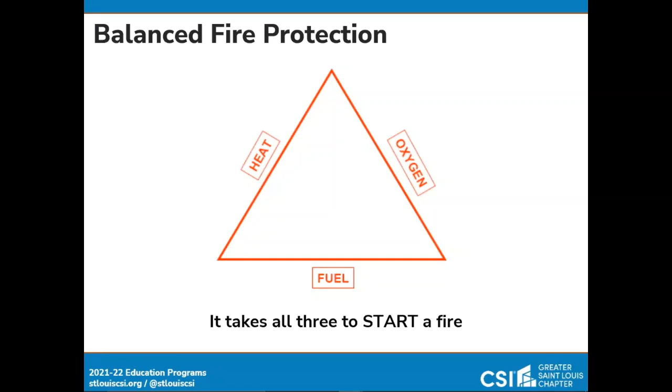In balanced fire protection, we have the same sort of thing. We have detection, or alarms. We have suppression, or sprinklers. These are active systems. Detection, or alarms, is the building saying, hey, I smell smoke. Let's get the heck out, right? The suppression is the sprinklers going off or the extinguishers being used. Underlying all this is passive fire protection systems. These are the things that are not seen but are every bit as important. And it takes all three to adequately protect the building against fire.

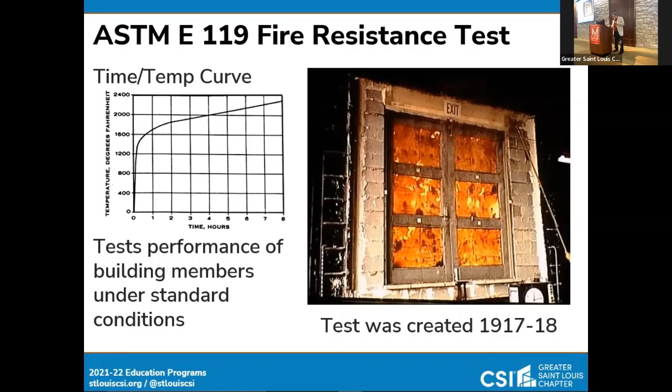Has anyone other than me witnessed this test, had an opportunity to see the test? It's wonderful, isn't it? It is just so cool. It is the E119 test, and the interesting thing about it is that the standard time-temperature curve and the test have been largely unchanged since 1917. So for more than 100 years, you are able to compare assemblies, doors, walls, and so forth. So that's basically the middle part, and that's all we're going to talk about that.

Our speakers are going to talk at length about spray-applied fireproofing and penetration and joint firestopping. We're pleased to have with us our first speaker by Zoom, Bill McHugh. We first met Bill when he was involved with the penetration and joint firestopping people, so he has experience there.

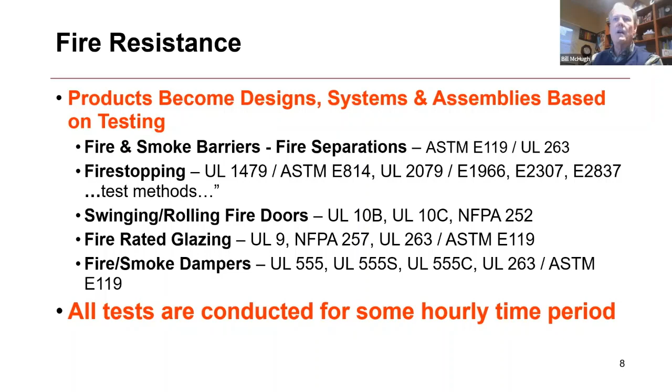One of the key things to remember, though, is none of these fire resistance pieces or elements, if you will, becomes fire resistance rated unless it's been through a fire test. George mentioned ASTM E119, UL 263, E119 being over 100 years old. All the other fire tests are based on that large-scale fire test, E119, UL 263. You'll find all of this in chapters 3, 4, 5, 6, 10 for the required ratings.

You know, how long should the fire resistance rating be? Go to chapter 4 for high rise and other types of occupancies, 6 for table 601, and of course, chapter 3 for other issues as well. But chapter 7 is how the ratings are determined. You'll probably hear more details from John Dalton and others about that. But really, we're trying to maintain structural integrity. I'm going to go really fast through this because I'm sure John Dalton and the guys from Hilti have some slides as well.

Key thing I want to point out in fireproofing is when you're evaluating any of the entrants to the marketplace, and there's a lot of new people entering the market because of the intumescent fire-resistant materials. Looks like paint, it looks like it's easy, but you know, fire resistance just isn't easy. One of the things that we found at our office is that companies call in and say, hey, Bill, I've tested my fireproofing on the bottom of a roof assembly or a beam assembly. And we did small scale tests and all that kind of thing. And I've spent a bunch of money and we think we're ready to go.

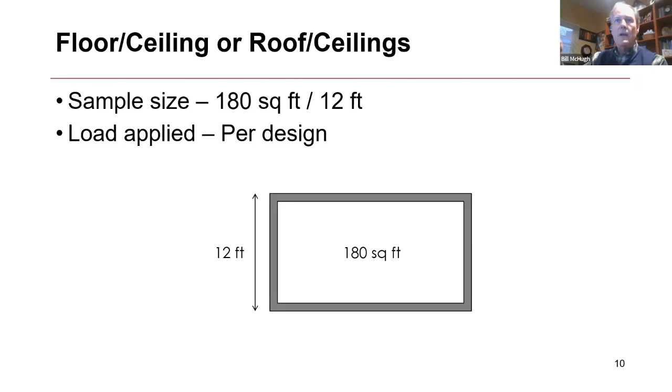And then I usually say back to them, have you done full scale testing with a load applied? Well, what do I mean about that? That means, like George said, let's get exciting and go to UL's Northbrook, Illinois facility, or you've got one right there in St. Louis. One day Carboline might want to take you to their laboratory and do a tour of their horizontal assembly fire test assembly, which is almost as big as the one here at UL.

Lay out the beams, lay down the decking, get the reinforcing steel together, pour the concrete, and then let it cure. We don't let it cure for 28 days. This goes for several months because all that water of convenience has to be gone, and then it has to get to a certain equilibrium. Otherwise, when they fire test it, the assembly will try to move the moisture out of it way too quick, and it'll basically explode in the fire test assembly, which is no fun.

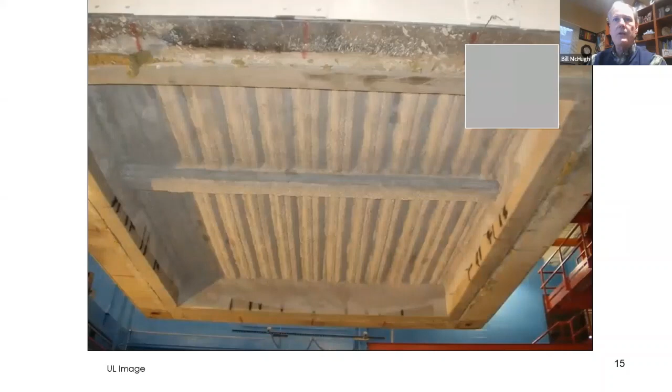So here's the horizontal assembly that you'd see at UL or any other fire test facility that has a horizontal assembly furnace to fire test these things. Look at the size of this. Small scale testing would not let the assembly sag enough to really test whether in fire conditions the fireproofing will stay in place and pass that fire test after a period of time.

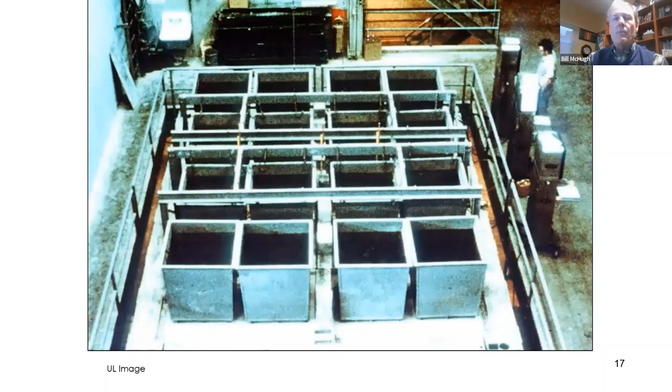All the gas furnace concept is done, as you can see here. Our buddy Andy that's in the fire test facility. This is just to show you how big these things are, 12 foot by 15 foot. An old picture, notice the 70s kind of hairdo over on the right-hand side, but all joking aside, the load is applied, whether it's through rams or filling up buckets with water, big ones, as you can see. But the idea is fire test it with a load applied to it.

Why? Because that's what happens in real buildings, file cabinets, office furniture, God knows what else people are going to put in these facilities. You want to fire test it so that horizontal assembly sags and puts strain on the fireproofing that's on the bottom of it. The manufacturers that you have in the room have tested their products in these types of applications. E119 says the acceptance criteria needs full scale with a load applied, not partial, not small scale, not modified or anything like that. So be careful when people start calling on you to talk about fireproofing, because many of them will have not invested as some of the manufacturers have.

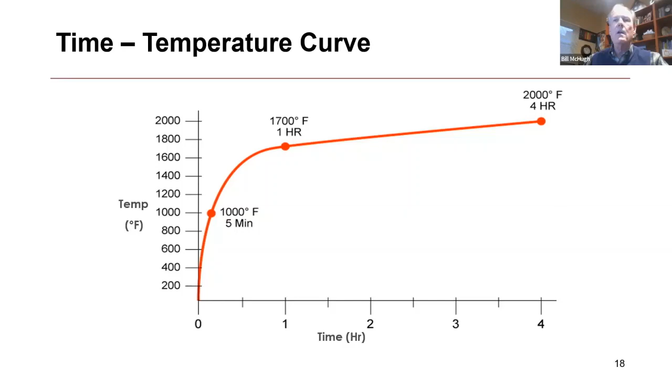George put up the time temperature curve. You'll probably see it again, but this same time temperature curve is used for fireproofing, fire stopping, fire rated doors, dampers, glazing. The whole fire protection package uses the same time temperature curve. It just changes when you change the type of materials that are being tested to become systems, because all of these are systems that are listed in some kind of a directory. We'll talk about that in a couple of minutes.

But the acceptance criteria for floor ceilings, roof ceiling assemblies: full scale testing, load supported, no flame passage, 250 degree Fahrenheit rise over ambient, meaning 325 degrees for the wall and for the floor as well. But when it comes to the structural elements, then you've got a different acceptance criteria. I'll let John Dalton from GCP handle that as well. So rapid fire through fireproofing.

Now let's talk about fire stopping a bit. Fire stopping is part of the compartmentation package that George mentioned. Structural fire resistance, structural steel, and even sometimes concrete assemblies when the fire rating is only 2 hours and need to go to 3 hours. Maybe spray fire resistant materials are used on the bottom of a horizontal assembly or on a beam of some kind or a column to increase the fire resistance rating of that concrete assembly.

But when it comes to compartmentation, as George pointed out, certainly the fire resistance rated wall and floor is tested to ASTM E119, but then you've got all of these other holes that are made for various reasons in a building, to run piping and services, to run air, to allow people to egress the building, and even to see things, because fire rated glazing is a new concept that's really taken off over the last few years.

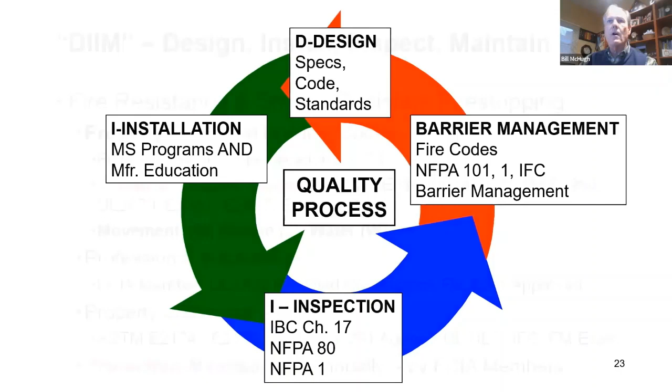You know, some states adopt it, others opt out of it, but in your specifications to cover yourself, make sure you've got it covered in Division 1, of course, the schedule of special inspections, and then the qualifications or standards that are used for fireproofing and fire stopping will be over in the other spec in Division 7. For fire stopping, it's 078400. For fireproofing, it'd be 078100, the general specifications for fire stopping and fireproofing.

When it comes to installation, UL qualified contractors, FM 4991 contractors, and then also there's UL qualified contractors for SFRM fireproofing. And then we've got from the NFCA a contractor accreditation program as well. The inspection standards, E2174 and E2393, are the fire stop inspection standards. The FCIA was a code proponent to put those into the International Building Code back in the 09 cycle for the 12 code. And special inspection for fireproofing has been in going back to the legacy codes, whether it's BOCA, UBC, or the Southern Building Code Congress International.

The one thing I want to really point out to you, though, is that it's not a product spec, any of this stuff, whether it's GCP or Hilti or Carboline or 3M, STI, Isolatek, any of the members of the NFCA, the FCIA, they've all spent millions of dollars at FM Approvals or at Intertek or any of the other laboratories coming up with tested and listed systems. And visiting the Product iQ, this is how people compete. You got to show the system. Can't just show the product or look for the product, but the system is what the contractor needs to be selecting. And by you communicating that through the construction documents, it'll get done right in the field.

Part of your specification, whether it's fireproofing or fire stopping, there's a listing under the UL Product iQ that'll cover whatever it is, boards and wraps, SFRM products, IFRM products, all found here at Product iQ. Intertek has their directory too. Or if you want to go to the FM Approval Guide, mainly fire stopping, not much in the steel fire protection industry in that. But what I really want to hone in on is specs, you know, it's the Construction Specifications Institute. So let's talk just for a couple of minutes about specs.

The fire stopping general spec, you know, there's 5 or 6 different sections in MasterFormat 2020 version that talk about fire stopping. But really you want to put it all in one place because the standards are very similar and the installation pieces are the same. The special inspection, similar. Keep it all in one place, 078400, and then specify in the other sections where the penetrations might be, plumbing, piping, et cetera, to go look at 078400. Same thing with fireproofing. Start with that 078100 and then use the standards from there as well.

Key things to remember, it's a system specification talking about fire resistance and not a product specification, but you still need to cover product properties in your specification to make sure that products are able to survive in the environment that they're going to be exposed in. FCIA member in good standing, NFCA member in good standing, all good things. There's an FM 4991 standard for the approval of firestop contractors, a UL qualified firestop contractor program. Again, the NFCA accredited fireproofing contractor for either SFRM and IFRM. And of course, we think it's really important to involve the manufacturer in the education of these contractor companies and their personnel as well.

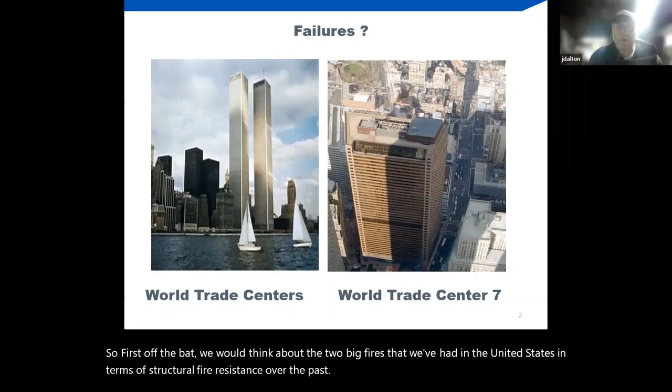First off the bat, we would think about the two big fires that we've had in the United States in terms of structural fire resistance over the past 20 years. Clearly, the two World Trade Center towers and Tower Number 7, and you could look at those and say they were significant failures of the fire resistance systems, and in some instances they were.

You would look at the two Twin Towers and you'd say, well, they did fall down. Certainly they did, and there's very few buildings in the world would be able to survive that sort of an impact, but they did stay upright for the best part of an hour, and thousands of people, maybe tens of thousands of people, were able to escape the buildings before they came down, based upon the fire resistance systems that had been put in there.

Clearly the sprinkler system would have been overwhelmed almost immediately, and it was a huge fire in terms of heat, not really enormous, but a huge fire that burned at sort of 1,000 degrees or so for the best part of an hour, and the buildings came down, as we all know. World Trade Center Tower Number 7 collapsed later on that day, and nobody was killed. It was an empty building at the time, but it was a spectacular failure.

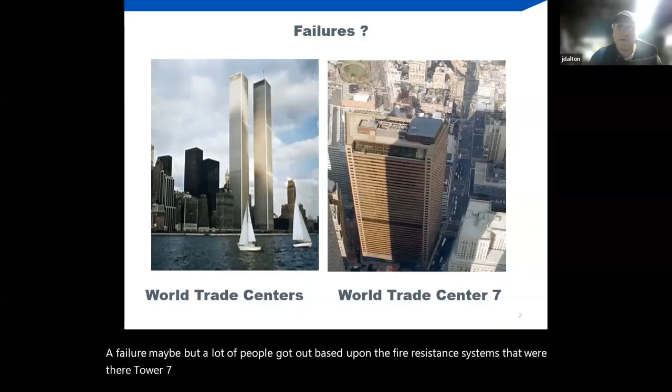So the World Trade Center Towers 1 and 2, a failure maybe, but a lot of people got out based upon the fire resistance systems that were there. Tower 7 lasted for 5 hours in a fully engulfed flame over several stories. And there was a lot of information gained from that because it was so widely studied, because we had so much information that was available to us. And so in terms of, is it a failure? Maybe, depends on what you define as a failure, but we learned a lot from it.

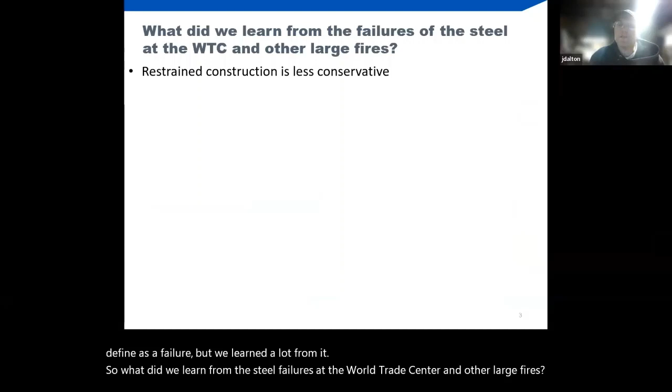So what did we learn from the steel failures at the World Trade Center and other large fires? We learned that restrained construction is less conservative. Restrained construction is a manner of doing the fire test that allows the supporting frame to help support the beam. And it's a much less conservative approach than the unrestrained systems, which are all temperature based. And big fires where the buildings have collapsed or there was a complete failure of the system tended to be restrained.

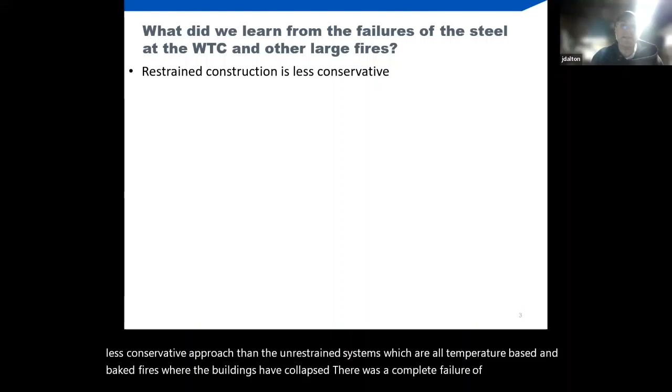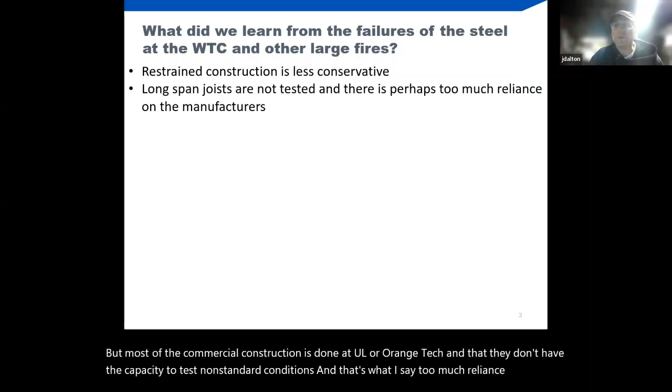Long span joists are not tested, and perhaps there's too much reliance on the manufacturers. So the manufacturers will test to a certain system, in most cases we would hope a full scale furnace at Underwriters, but we don't have the ability to test everything, and we're still not able to test long span joists, except if we would go to somewhere like NIST that have the capacity. But most of the commercial construction is done at UL or Intertek, and they don't have the capacity to test non-standard conditions. That's what I say, too much reliance on the manufacturers. So a condition which nobody had tested, nobody could test, and we were still sort of able to engineer our way to a system that eventually didn't turn out to be successful.

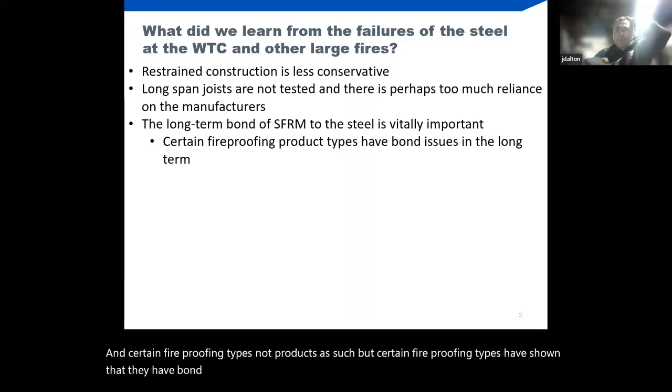The long-term bond of SFRM, so SFRM is a term we use to define passive fire protection. That long-term bond of the product to the steel is vitally important. And certain fireproofing types, not products as such, but certain fireproofing types have shown that they have bond issues in the long term, right? So one of the things we learned from the World Trade Center Tower was that there was a significant portion of the steel that had no fireproofing on it at all, because it had been in place for the best part of 30 years, and the bond of the fireproofing to the steel had decreased to a large extent on lots of floors.

Now they were going up the building and replacing fireproofing as needed, or when floors became vacant. But that long-term bond of the fireproofing to the steel is very important. You know, if you spray it and 28 days later it passes a bond test, but it's not there 28 months or 28 years later, it's really a failure. So we did learn something from that. And the NIST report talked about a lot of things, but I'm just dealing with the fire protection systems.

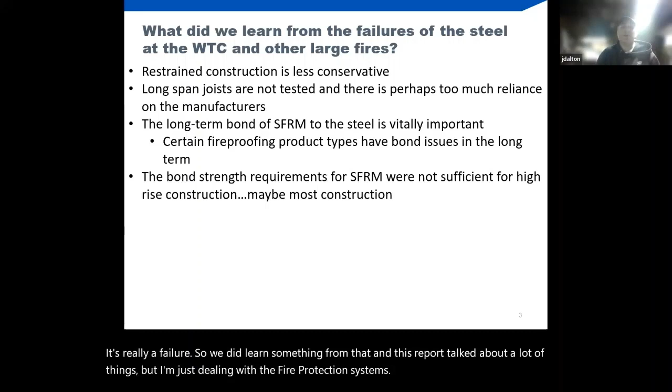The bond strengths of SFRM were not sufficient for high-rise construction. High-rise construction is much bigger of a target if you were interested in taking down a building. Though the bond strength of fireproofing was the same regardless if you were building a 2-room auto showroom on a ring road or a 70-story high-rise in the middle of a city. And so as a result of the World Trade Center tower failures, there was some review of the bond strengths of fireproofing on the structural steel.

Inspection and maintenance of the SFRM was not a priority. Bill touched about that, and he and the NFCA and others were successful in making this more of a priority. It's not just a case of spraying it and hoping for the best, sort of feel-good fireproofing, spray and pray fireproofing.

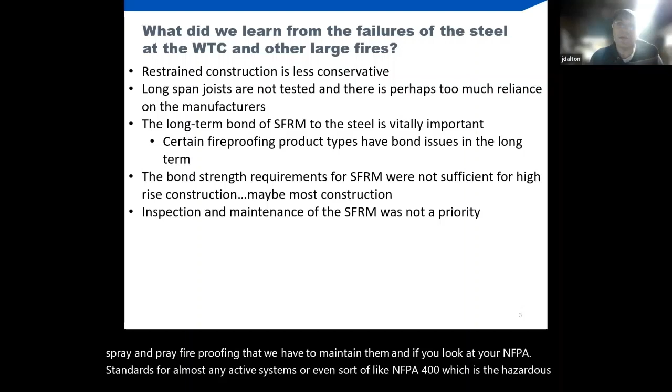We have to maintain them. If you look at your NFPA standards for almost any active systems, or even NFPA 400, the Hazardous Materials Code, that talks about inspection, testing, and maintenance. Nearly every NFPA code has an ITM section, typically towards the back, but it's annual, or every couple of months, or 5 years, every pump has to be retested. And we didn't have that requirement. We still really don't have that requirement for SFRM, but we're moving in the right direction.

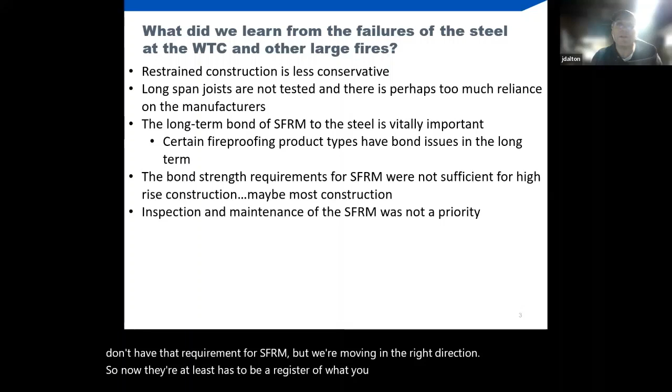So now there at least has to be a register of what fireproofing is on site, and you're supposed to at least look at it once a year, just to make sure that the product remains on the steel. If it's not there, it can't work.

There's a fairly famous study by a fire protection professor at the University of Maryland that talks about the failure of unprotected steel. A W10 by 49 column, which is a fairly common one that we test, will see significant reductions in the fire resistance rating if you expose pieces of steel the size of a quarter. So a piece of unprotected steel on a W10 by 49, you can expect to see a reduction in the fire resistance rating of about 15% of 1 hour.

So if it's fallen off or been knocked off by other trades, you'll see significant reductions in fire protection. There's a saying within fire protection that a failure anywhere leads to a failure everywhere really quickly, and that's just the way it is when you see fire tests.

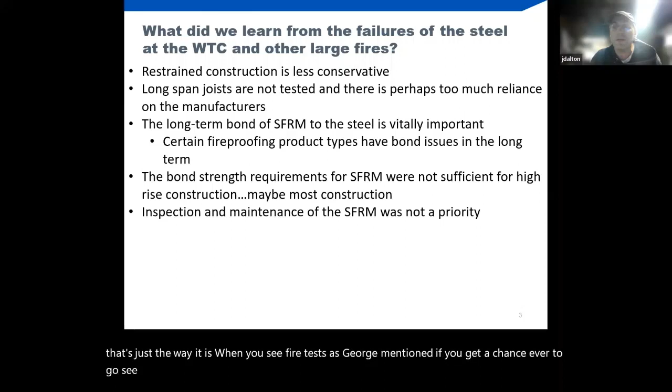As George mentioned, if you get a chance to go see a full-scale fire test, it's really illuminating how hot they get, and how quickly things go pear-shaped once they start to go. It's fine, it settles along, the fire test is great, and then all of a sudden it just gets hot, and once it starts to go, it goes really quickly.

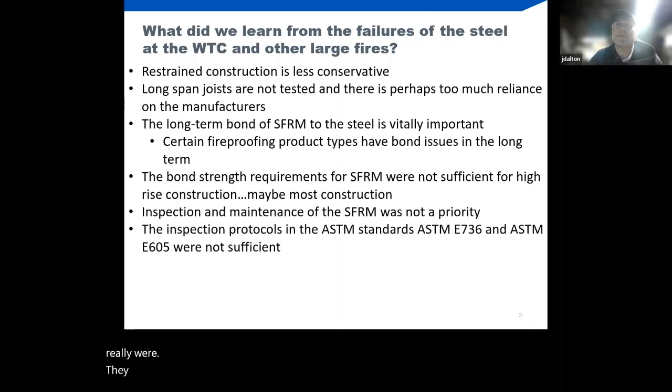The inspection and protocols in the ASTM standards E736 and E605 were not sufficient. They really weren't. They didn't require enough inspections, so you could do very little inspections and get a pass on the building. The building code has been modified now to increase the inspection frequencies.

As I just talked about, no maintenance or periodic inspections are required. So what did we learn? Restrained construction, less conservative, I mentioned. What's become of this? Nothing really. That is still a thing. There has been no real move away from allowing buildings to be deemed restrained. The building code does require that everything be initially classified as unrestrained, which is appropriately conservative.

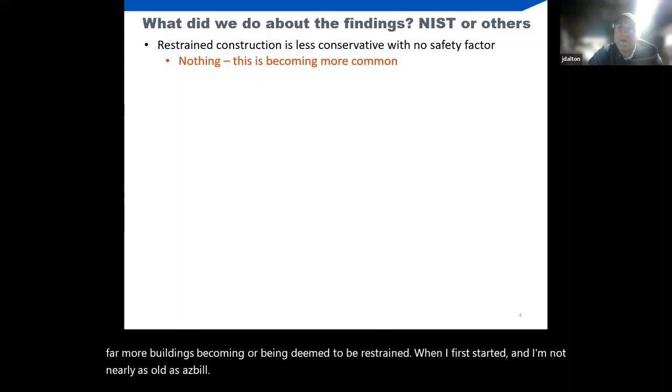But we do now see far more buildings becoming or being deemed to be restrained. When I first started, and I'm not nearly as old as Bill, we never saw restrained construction anywhere outside of New York. Now we see restrained construction everywhere.

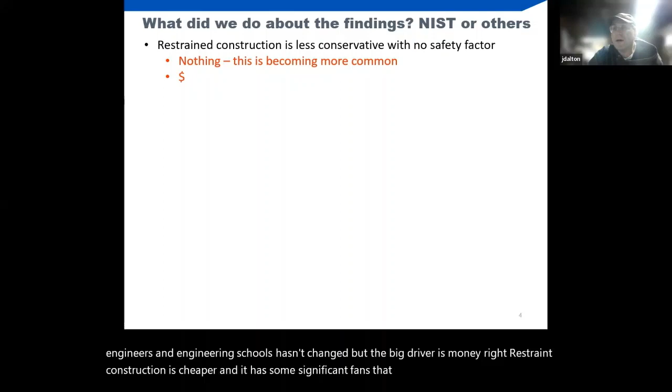The methodology hasn't changed. The teaching of structural engineers in engineering schools hasn't changed, but the big driver is money. Restrained construction is cheaper, and it has some significant fans that have been pushing pretty hard on the code cycle, trying to figure out ways to manipulate the ASTM and UL standards to get more products or projects deemed restrained. So unfortunately, that hasn't been beneficial.

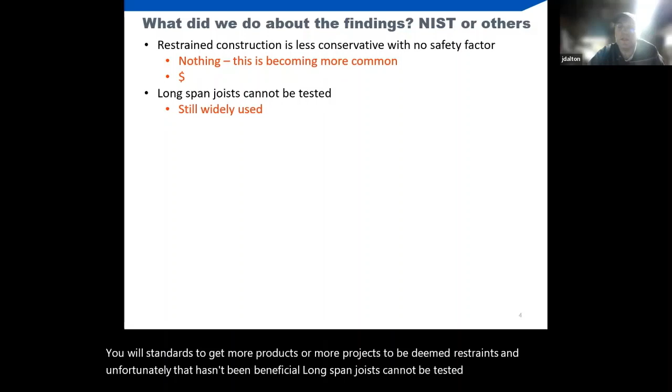Long span joists cannot be tested. They're still widely used. We still see trusses 60, 70 feet long. We have no way to test them. We've no idea how our products will react when exposed to that level of deflection during a fire test. Ambient conditions are fine, there's no real issue. It's when they get hot and start to sag, what happens? Because we're just not able to test at that level or length of span, and we can't measure or know how we'll do with that level of deflection.

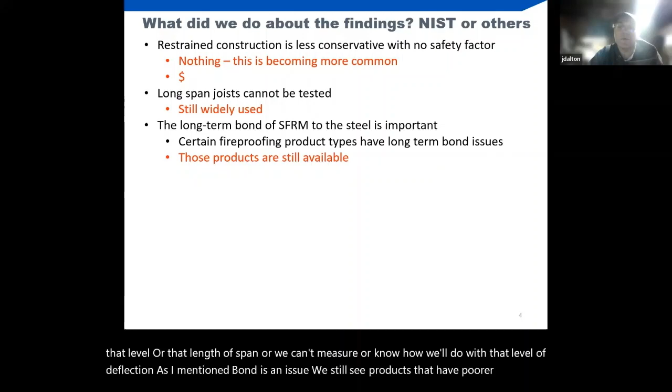As I mentioned, bond is an issue. We still see products that have poor long-term bond being widely used. Again, it's a money thing. To my mind, certain types of fireproofing products should have been discontinued completely after a series of fairly high-profile fires in the US over the past 30 or 40 years.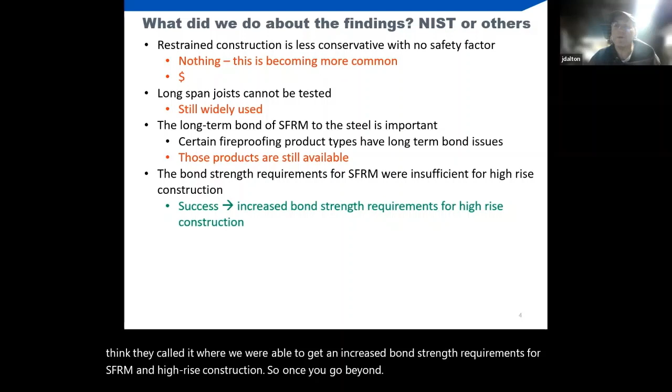So once you go beyond 75 feet, we do see an increased requirement for bond strengths. And then once you go beyond 420, it jumps again. So bigger buildings require products that are much more likely to remain in place for a long term, have much greater bond. I'm not sure, because it's not a standard test, if anybody would be able to test that level of impact.

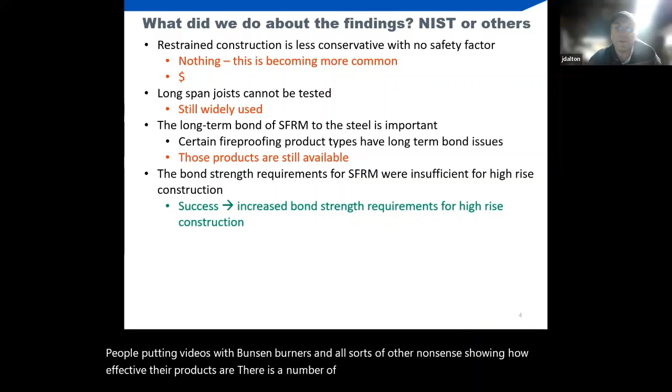But there are products that can withstand a significant blast effect and still provide the fire resistance rating. Just to touch on that, there's no bond test for that. To Bill's point, one of the things as a task group chair of the ASTM that drives me insane, and as a fire professional, is the YouTube test standard — people putting videos with Bunsen burners and all sorts of other nonsense showing how effective their products are. There are thousands of test standards that can be used properly. We don't want a situation where some guy is making intumescent, no disrespect to that guy from Hilti, but is making a fire protection product in their bathtub, running some sort of Bunsen burner test, and going to the AHJ or the spec writer or the architect saying our product is acceptable, look at this test. There are plenty of standard tests available that demonstrate compliance to the building code or your specifications.

Greater inspections, again, a success. We've had, I think, a 400% increase in the amount of inspections that are now required. So we see a much better application, I think, of SFRMs than we probably did, because the chances of getting caught, or a poor application being picked up on, are much greater now than they were previously.

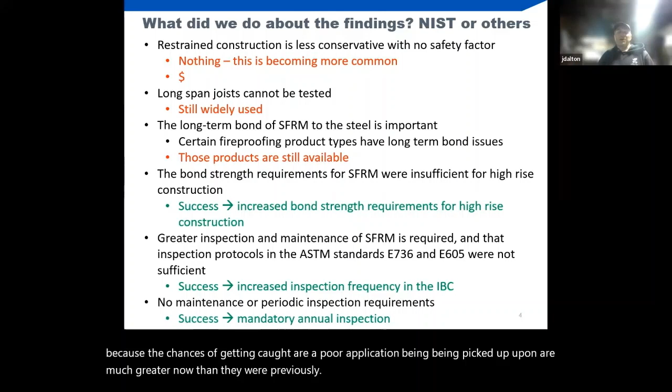And then, no maintenance or periodic inspection — again, we've had some success there. Mandatory annual inspections; they must keep an inventory of what they've got. So that's been a good thing. And I think as we go on, we will see that becoming much more appreciated — there'll be a greater understanding of why it needs to be done. So to my mind, that's been a big success for us.

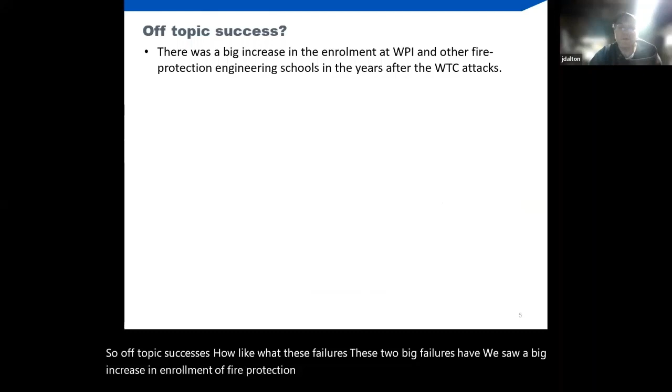So off-topic successes — how these two big failures have had an effect: we saw a big increase in enrollment of fire protection engineers. WPI, University of Maryland, Cal, Oklahoma — they've had big increases in the number of people interested in fire protection.

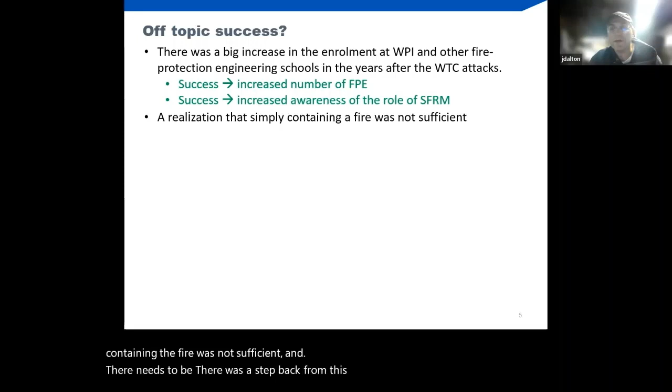People are much more aware of the role of SFRM than they were previously. Everybody became an expert on fire protection for a couple of years after the World Trade Center — they all had various theories about what happened, but we've seen a much better understanding of it, a realization that simply containing the fire was not sufficient. There was a step back from this perception that sprinklers were the be-all and end-all. Sprinklers are outstanding — if I were building a new home, I would want them in that home. They offer a great level of fire resistance, but they're not infallible.

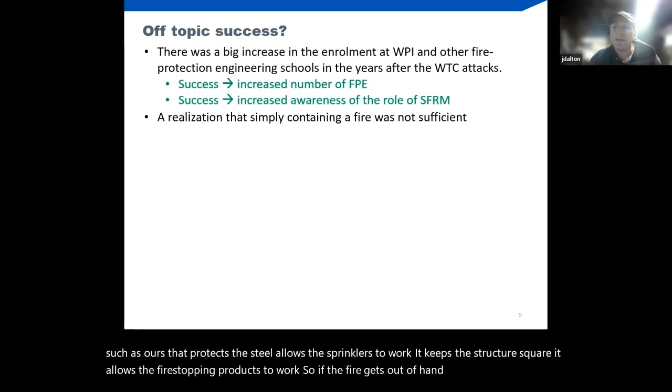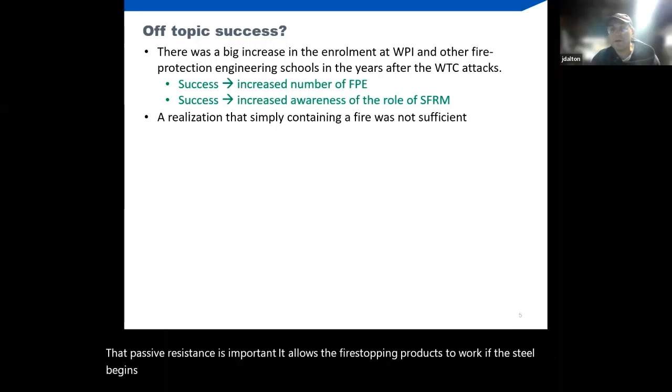Having a product such as ours that protects the steel allows the sprinklers to work. It keeps the structure square, and it allows the fire stopping products to work. So if the fire gets out of hand and the sprinklers are struggling against it, the steel provides support in many instances for the other fire-rated systems — like you need a 2-hour separation between your fire pump and the rest of the building. That passive resistance is important; it allows the fire stopping products to work. If the steel begins to sag and pulls the fire stopping off the wall, it's going to allow smoke and other byproducts of combustion to move around the building. So we're much more aware of that now.

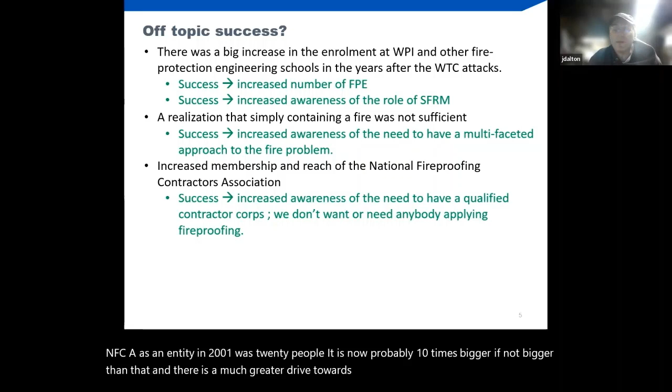And a nod to Bill and the NFCA — we have seen a significant increase, a huge increase, in the responsibility taken by the fire protection community to doing the right thing. The NFCA as an entity in 2001 was 20 people; it is now probably 10 times bigger, if not bigger than that. There is a much greater drive towards accountability, towards having people on the fire protection team be qualified individuals, as opposed to just somebody who has been doing it for a long time. There's a series of exams that the NFCA offer, that UL offer, that allow people to become ICC qualified or to be a competent individual to run fireproofing crews, which is important.

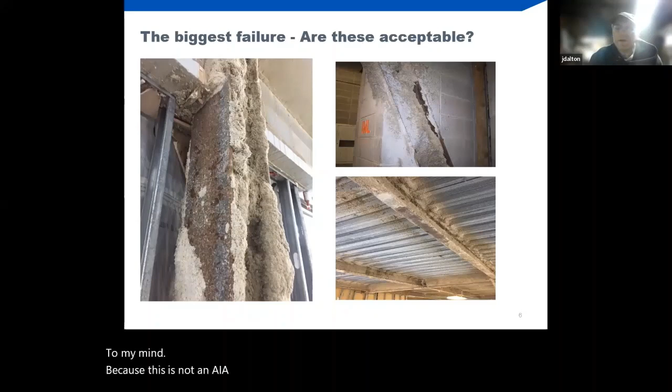To my mind, because this is not an AIA presentation, this is probably the biggest failure. I'm not a big fan of this sort of mineral fiber based fireproofing. I think long term it has an issue, and it becomes very friable in the long term.

It is a failure of a fire protection system, but can we learn from it? There are plenty of alternatives available. There's always the cementitious products, the likes of Cafco 300, Southwest Type 5, Carboline's product, Monokote. There's various intumescents that can be used too, but I'm not a huge fan of mineral fiber based fireproofing as a rule.

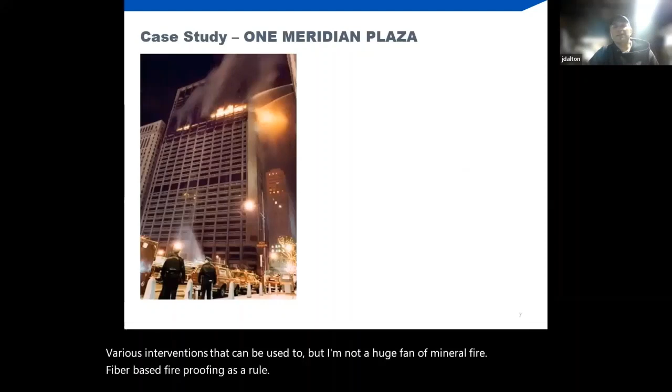So case studies, One Meridian in Philadelphia. Would this be considered a failure, right? So big fire, building didn't collapse, stayed upright, stayed square, eventually had to come down. So would we say it's a failure or a success? These are the beams inside the building.

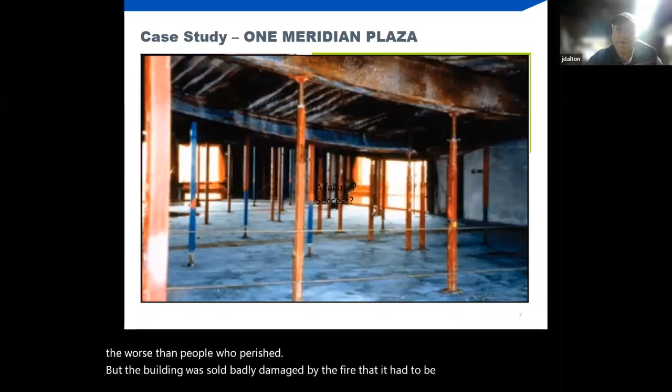So you could say, well, look, the loss of life was small compared to what it could have been. Unfortunately, there were some people who perished. But the building was so badly damaged by the fire that it had to be demolished. So from a continuity of operations, from an environmental impact, from an insurer's impact, that was a failure. That was a failure of the fire resistant systems.

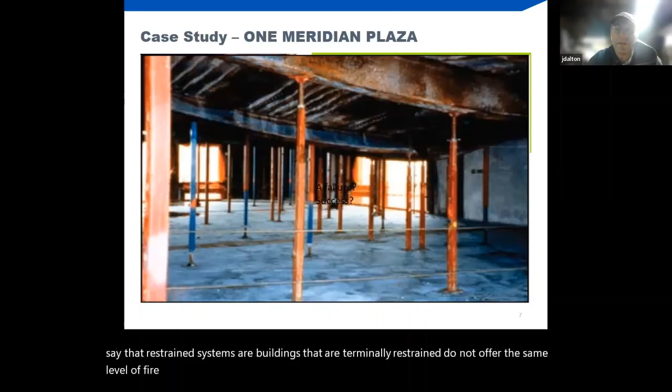What can we learn from it? We would say that restrained systems or buildings that are thermally restrained do not offer the same level of fire protection. Once it becomes a big enough fire, it's a kind of one and done system, that you'll get one fire out of your building because you can't fix this.

Then I would look at another one, First Interstate building in Los Angeles, California. Similar type of fire, huge office building, fire burned for 4 hours and 43 minutes, I think it was. But the thickness of the fireproofing, because it's an unrestrained system, was significantly greater, maybe 50% greater. It was a definite success. There was no loss of life.

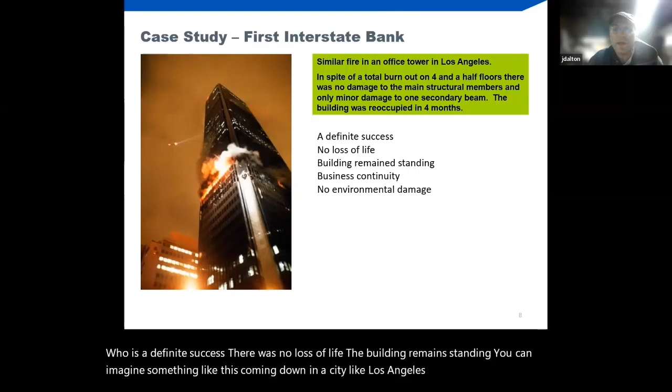The building remained standing. You can imagine something like this coming down in a city like Los Angeles, how horrific that would have been. It remained standing. The businesses were able to reopen in the building 4 months later. No environmental damage, as opposed to the cost and the environmental impact of repairing or replacing such a building.

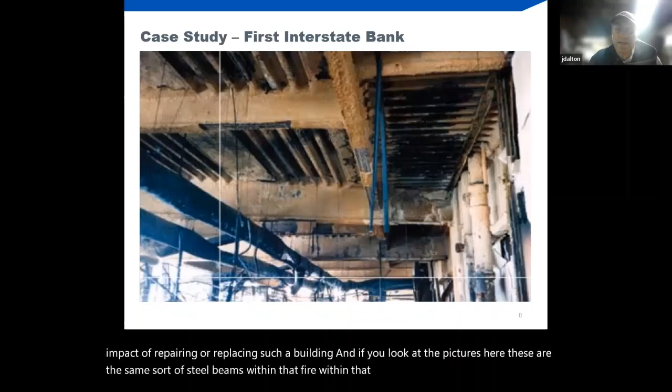And if you look at the pictures here, these are the same sort of steel beams within that fire zone. You'll notice that they didn't sag, that they remained pretty square. The fireproofing had to come off, but as you can see, the place was a complete mess. But they were able to just reapply product to it.

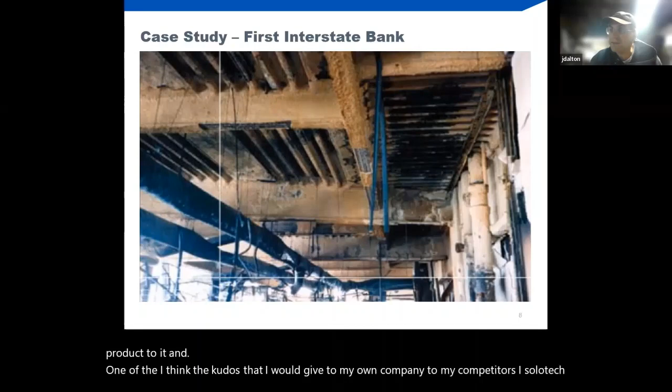And the kudos that I would give to my own company and to my competitors, Isolatek and Carboline and Hilti and stuff, is these big companies tend to have extremely good quality control programs. And you would expect this level of result. This is what we're hoping to achieve.

And so this, as a failure, sure, there was a fire. Sprinkler system didn't work, was decommissioned. But you would say that this was a success. So we did have a failure, but we did gain something from it. We learned that unrestrained buildings do tend to survive better in fires.

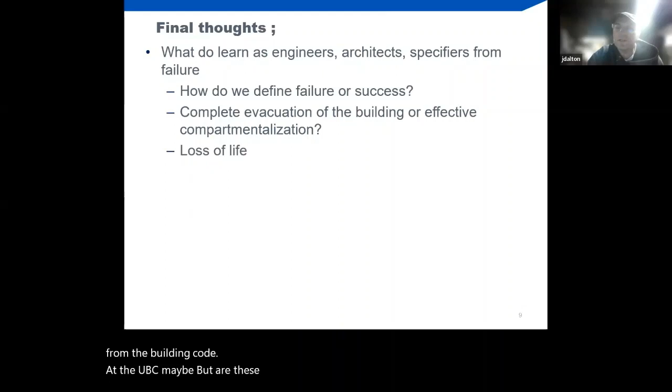So what do we as engineers, architects, specifiers learn from failure? How would we define a failure or a success with your fire protection system? So it's complete evacuation of the building, effective compartmentalization. We did have that compartmentalization schematic from the building code, the UBC maybe, but are these how we would define success? Loss of life is clearly the worst case. Clearly nobody wants that. And if we can prevent that, then we're in good shape.

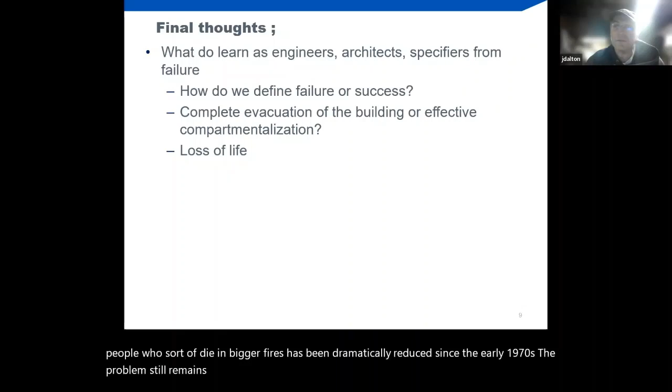But the fire problem in North America is not really related to what we do, and you as architects and whatnot. It's not really our thing, because the number of people who die in bigger fires has been dramatically reduced since the early 1970s. The problem still remains in houses. The number of fatalities in houses remains worryingly high and is pretty constant. And that's where the fire problem lies. That's where the real focus should be within the fire protection community.

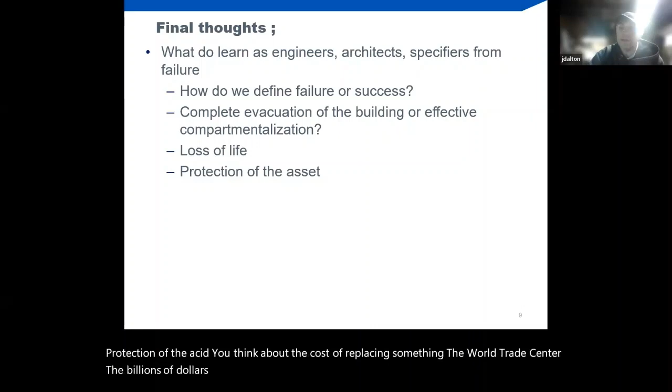Protection of the asset. You think about the cost of replacing something like the World Trade Center, billions of dollars that would go in, the enormous impact that's got. Is that the criteria for success or failure? Business continuity, again, businesses go down for months at a time. Is that a loss? Yeah, that would be a loss. Environmental damage, the cost of replacing all that concrete and steel is enormous.

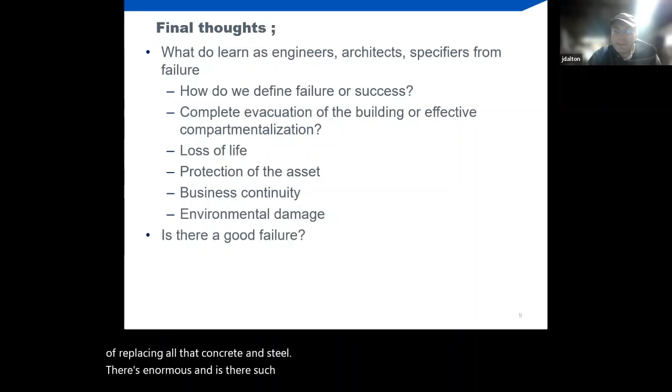And is there such a thing as a good failure? Absolutely. So within the fire protection, we do a lot of fire testing, not just for ourselves, but we do quite a lot of it as part of UL industry standard groups. And we learned a lot from those failures.

Several years ago, we were part of a team that paid for 8 full-scale fire tests, and it did lead to a significant increase in our understanding of an issue with respect to how assemblies are loaded during the test. This has made the building safer, but we did burn through $1 million worth of money failing systems just to get a better understanding of it. And as we talked about, those buildings where they had those large scale fires, they did make the buildings built subsequently much safer.

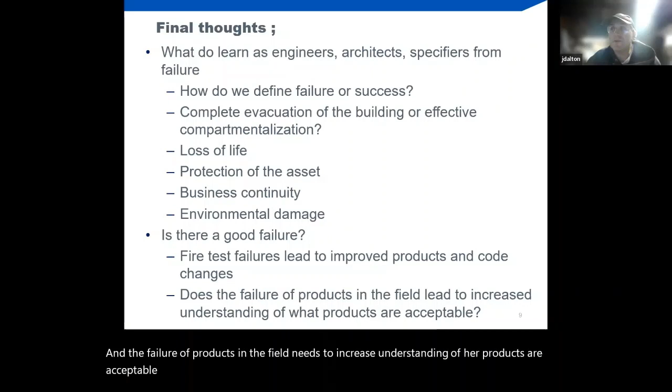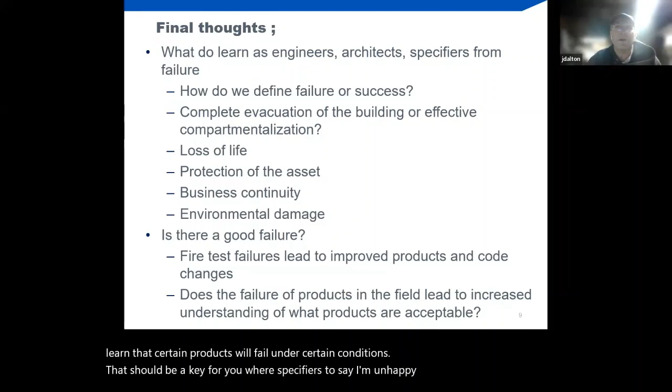And the failure of products in the field leads to increased understanding of what products are acceptable. Yes, I would say that's true. So when we do bond tests, or deflection testing or air erosion testing of products in the field, and we learn that certain products will fail under certain conditions, that should be a key for you as specifiers to say, well, I'm unhappy about the bond strength or the air erosion properties, or any other of the 12 or so ASTM standards that we use for SFRMs, to choose better products.

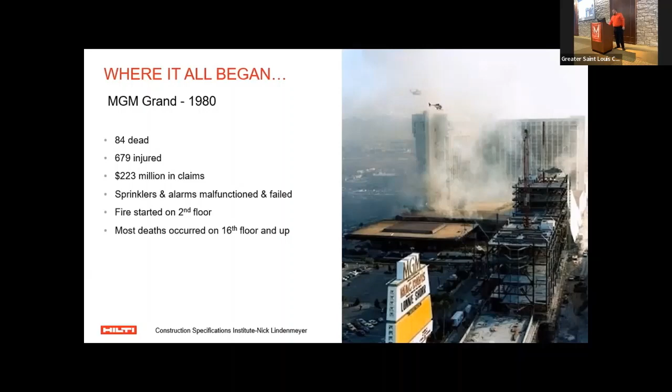I do these types of presentations with the inspection community, with fire marshals, with subcontractors. One of the first ones that I did was with a fire marshal, and they said absolutely the idea is to get everyone out of the building safely. It's also to allow the firefighters to come in, put out the fire, and also exit themselves, right? So when they're going into a building and we're talking about fire rated assemblies, the 1 through 4 hour ratings, they're going to be also taking that into consideration. If the fire stopping is done correctly and it's a 2-hour assembly, and the fire's been burning for an hour, in theory, they need another hour to get in and out of the building before that fire spreads.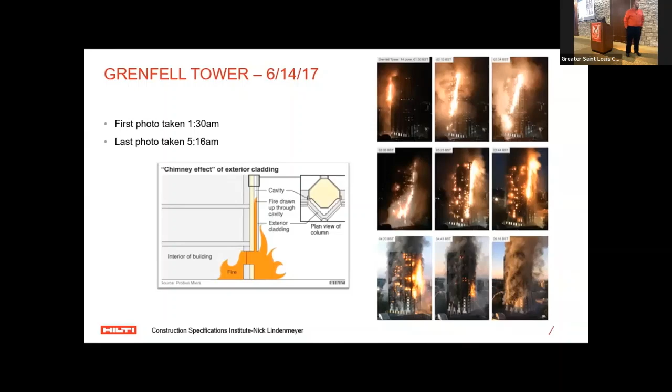So here's a 9-picture shot of it. First photo was taken at 1:30. Last one was taken at 5:16. So again, the outside of the building just really allowed a chimney effect to spread all the way up the entirety of the building. And you can see here, it just really engulfs the entire building. Every single side of the building was charred.

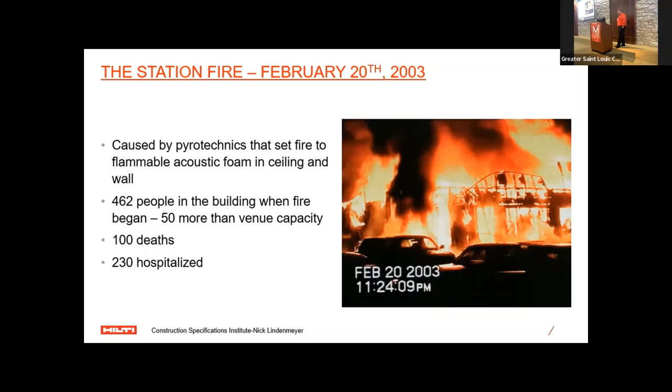And because the venue capacity was over what it was supposed to be, again, I wasn't going to show the whole video because it does get kind of graphic, and it just gives me goosebumps watching it every time. But people are literally trying to get out of the building and physically can't get past one another because it's such a tight corridor, and because the fire spread so quickly. So it's a scary video. I always show this to my contractors because it really hits home that this can happen anywhere, and we got to do our part as the manufacturer, the contractor, and the architect to make sure that we're fire stopping the building correctly.

So we asked, why do these keep happening? I think it's a variety of reasons. It's not just one thing. Lack of fire stop knowledge on products and systems. So the guys before me mentioned everything's tested in accordance to a system. So I usually bring a tube of fire caulk with me to my presentations and to my subcontractors, and I'll throw it to one of them and say, what's the hourly rating on this fire caulk? Get a variety of answers, right? 1 hour, 2 hour, 3 hour, 4 hour. The answer is 0, right? And they're shocked when I tell them that.

We don't have a magical fire caulk that you can put on anything and it's going to put the fire out or stop the fire, right? All of our product is tested in accordance to a system, and it's very specifically tested: the amount of depth, the type of product, what can go through the penetration, if it's a metallic versus non-metallic pipe. So a lot of times when I'm in the field with these guys, I'll go up to them randomly and say, what system are you using? I don't know, just put fire caulk on it. It's kind of scary, right, that this is happening. So lack of knowledge, I think that's a major one. So that's part of my job, to do these types of presentations, walk through a fire stop system, a UL system, with them, and show them exactly how to fire stop it the correct way.

And again, to that point, not following it to a T. So if it says a 4-inch pipe and they're installing a 5-inch PVC, they say, oh, it's close enough. Again, they're all tested very specifically to the metrics that are on the system.

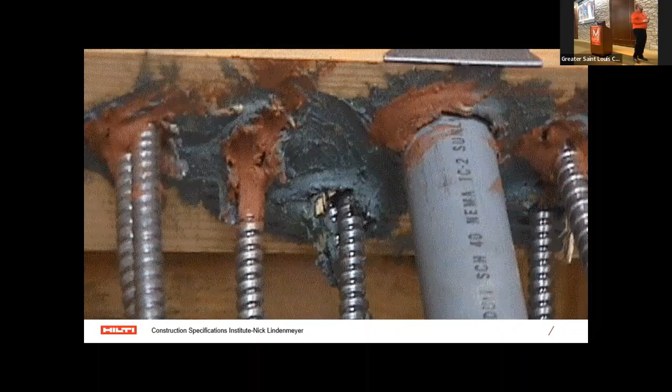It's kind of crazy. I had a contractor, I showed him this video, he said that's what we used to do. That was just best practices. You get a tube of fire caulk, you get your drywall mud, mix it together, throw it in the opening. So that just doesn't fly. We don't know how it's going to react. Again, it's a chemical. We don't know how they're going to react with each other.

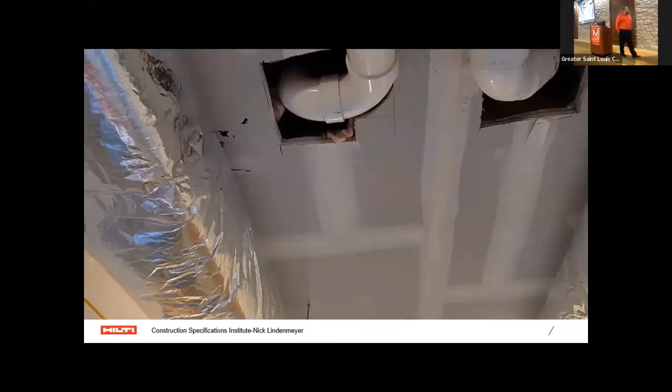So this one, I actually took this picture myself. Not going to disclose where this was, but this was a picture that a customer came up to me. They had me walk a job site with them. They said, hey, can you get me a case of fire caulk? I need to fire caulk that. I said, nope, not going to do that. You just set the whole case in place. Yeah, exactly, hope it works.

So this one, a couple things going on. It's a 4-inch pipe, so automatically rules out fire caulk, FS1. It's going at an angle, it has an elbow in the opening, it has 2 hubs in the opening. So we had to do an engineering judgment on this one, but it really just amazed me, and it really shed some light that contractors don't always know what they're doing. And that's part of my job, is to educate them on best practices and what not to do. They don't know what they don't know.

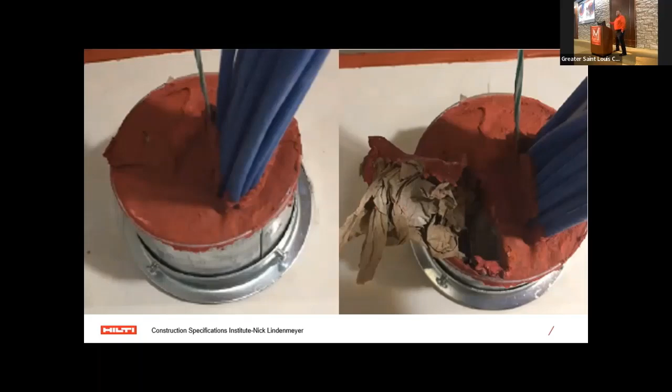So they tried to stuff paper towels in the opening to simulate that they got enough depth of fire caulk in there. They're probably calling for mineral underneath, and obviously paper towels are not very fire resistant. Neither is toilet paper, right?

Yeah, it is absolutely astonishing some of the stuff we see. That is awesome. And during the COVID times when toilet paper was scarce, maybe they were saving it. I don't know, but not a good thing to do, right?

It's very real. It still happens. You know, I gave the examples of all the fires. It still happens though, right? There's still going to be situations where people are trying to save time, save money, and it's not the right way to do it. It's a life safety issue. People's lives are at stake when they're in a building, especially if you think about a hospital, a senior living home, an apartment complex, a hotel, anywhere where you're not familiar with the layout.

One of the guys mentioned with the residential, you know your home layout. People still die every day in their own home because they can't get out because of that smoke. Now imagine a place, a hospital or hotel where people are either moving slower or you don't know the layout. That just makes it even more challenging to get out of the building. So that's why we have to have this fire stop in place.

So maintenance, how often? These guys touched on it a little bit already. So it is annually. So here's a little snippet. I'll start kind of where it gets into. Such construction shall be visually inspected by the owner annually and properly repaired, restored, and replaced where damaged, altered, breached, or penetrated. So they call for records of the inspection, which we'll go over.

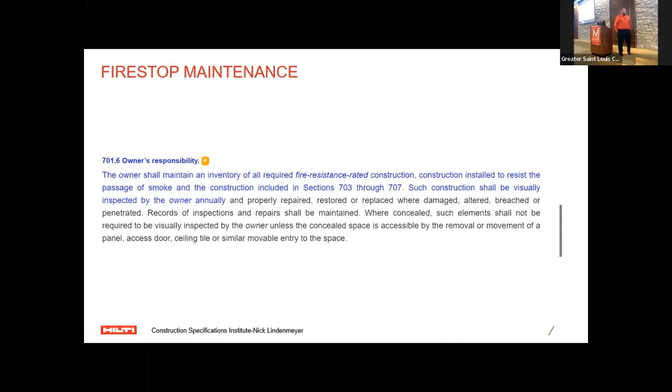And then one of the gentlemen mentioned it before, where it's concealed, it does not require to be visually inspected unless you can get to it. So if you can lift a panel or move a panel across or a ceiling tile to get to that, it needs to be inspected as well. Anything we can do as the building owners to inspect it the right way and periodically, annually, that's what we need to do. So what's it look like?

Typically when I'm doing fire stop presentations, I harp on the labels, right? So labels are great for a couple of reasons. One, for the inspection on the front end, right? Makes the inspection easier for whatever city inspector is doing it. They have the system, they have the product, who installed it, when it was installed, all those good details. And if you look at this one too, right by the application, it's perfectly tooled down. Same thing with this one, looks really nice.

These are what these labels look like. These are crucial in maintenance. This is how the building owner knows what's to be inspected, what product was used. So I tell the customers there's 4 main takeaways on these labels that you need to fill out at the bare minimum. Everything else you're welcome to fill out too, but product is one of the first ones. Obviously important if something gets damaged or if a cable gets pulled out and fire stop falls out, we want to make sure if it's a putty stick that was in place, if it was a pipe collar, if it was FS1, if it was a silicone, we want to know what product it was.

The most important one on here is the system, right? So if the fire stop gets damaged, we want to be able to go into Hilti's website and say, okay, this was WL1054. This is a metal pipe through a gyp wall. How do we fire stop this? How do we make sure that it's the correct fire stop that's done right now on it? So those are the 2 most important.

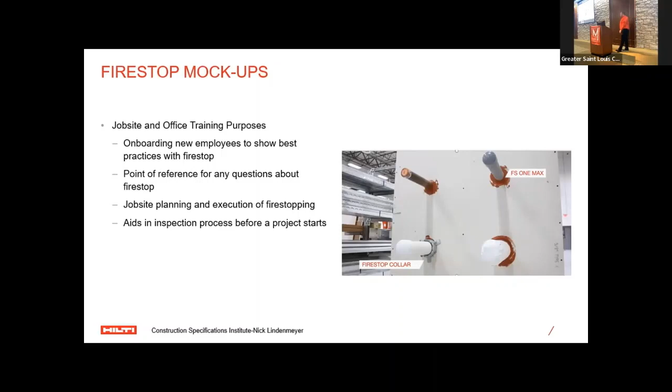Last thing I wanted to talk about is Hilti's interaction with subcontractors. We try to get involved way ahead of the process, and what we pitch to our contractors and customers is that we're going to be there before the project starts, during the project, and then after if they have any questions, or if we need to handle any questions from the inspectors.

So we do the project submittals where we build out a system book for the customer that they can in turn hand to the GC, who turns it into the inspector. We do job site walkthroughs, like I said before, where we'll come out and actually look at the penetrations, letting them know how to fire stop it correctly.

We're getting involved on the BIM side and the pre-construction coordination with clash detection. We have our own program and our own team that we literally just came out with last year. So we're starting to see that more and more often on job sites - getting all this done beforehand. Our program basically loads all the penetrations in from the drawings and gives us any spots where we're going to have clash detections, where we know we'll need engineering judgments beforehand, so we can jump way ahead of that. It's not at the end of the project where they need it like this - it's getting it all done beforehand.

And then finally, doing the installer trainings. We do these in the office and on the job sites. Again, it's just a best practice where I come in, talk with the contractors about how they fire stop currently, who knows anything about fire stops, sharing best practices that I've heard from inspectors, and really showing them how to read a system and best practices with fire stops.

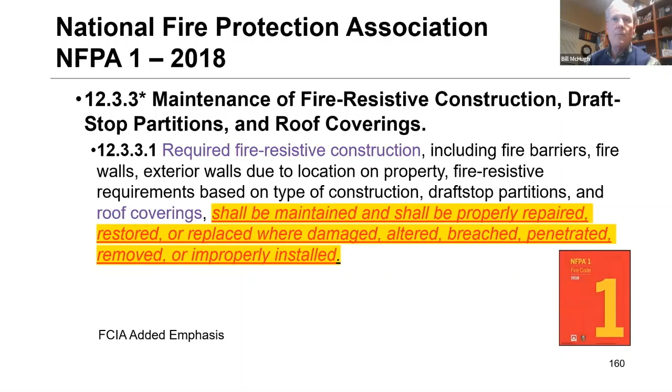But if they put in their budget every year to do something to maintain their fire resistance, take a look at the beams and columns where they're exposed. The intumescent fire resistant material on steel might have gotten bumped—same thing with spray fire resistant materials. Someone with expertise needs to be able to repair that, and someone with expertise needs to be able to do that annual visual inspection. NFPA 1 even goes as far as to say that.

Let's see if I can—here we go. There's NFPA 1, look at this: a written report prepared by the person responsible for construction shall be submitted to the AHJ, and that person responsible has got to have technical knowledge. Think about yourself maybe as an expert witness someday where there's been an issue with fire resistance.

I mean, the fire codes are just screaming to the building owner, you better take care of this stuff. Sprinklers aren't perfect, alarms aren't perfect, passive fire resistance isn't perfect. But all three of them have requirements to maintain their protection.

I'm not going to go any further, but just know, look at all these slides. Look at them all in the fire code. Advise your clients that they need to take care of this stuff. And, you know, frankly, we'll be able to protect people better in buildings.

Well done to our co-presenters. Each one of you guys did a great job. Thank you for doing that and representing our industry well. Other questions? Thank you, Bill, and thank you for all you've done over your career to inform a lot of us on stuff that we didn't know and should have known. Fred has got a question here.

Thank you, George. My question has to do with penetration firestopping. Invariably, we specify that to be single source on the project. And on almost all projects, invariably there is some point where the contractor, general contractor or CM, in conjunction with the main trades, asks that not be done, that it be fragmented between different trades. So mechanical, plumbing, electrical, communications, security wire, etc. is all fragmented. Why is that such an obstacle? People always talk about that being a cost. Why would that be? Yeah, let me address that real quickly.

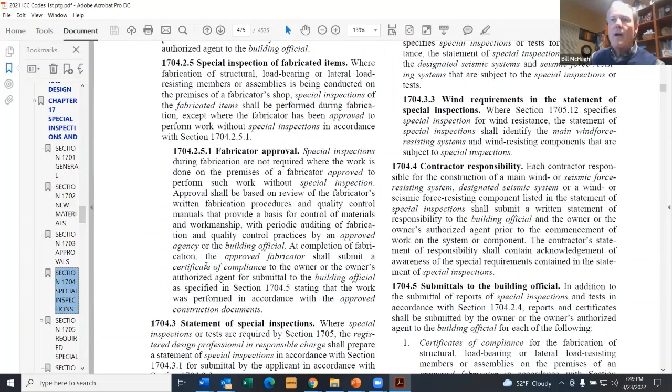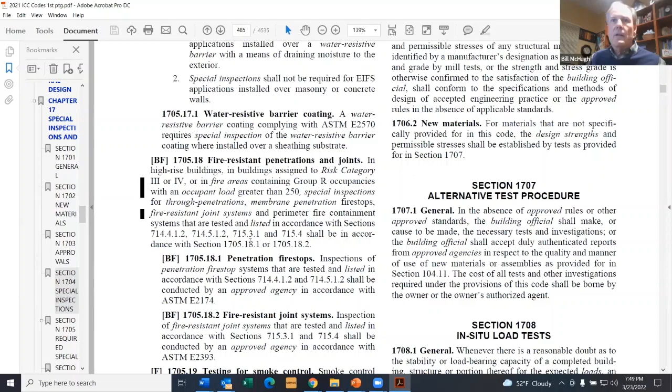inspected that fire stopping. If you think about it, one of the falsities of special inspection is, if the inspection agency is good, then all is good. If the special inspection agency has no idea what they're looking at and just passes it, then we got a big problem. But here's what it says in Chapter 17 of the Building Code in 1705.18. And believe it or not, it's right after the SFRM, IFRM sections is where you'll find the fire stop inspection.

So a special inspection agency should have gone through and destructively tested or visually inspected. Destroy 2% of each type of penetration, no less than 1 per 10,000 square foot of floor area. And they do it by type, in other words, by system, by installation contractor. So the electrician, the plumber, everybody else on the project should have gotten 2% of their holes cut open. And if that inspection agency knew what they were doing, they would cut it and go, okay, looks like your thickness is off a little bit.

And then secondly, you've got a sleeve sticking up above the floor about 6 inches. The system only allows 2 inches to be above the floor. We have to reject this one. Doesn't necessarily mean that they have to go tear it all out. It means they have to find another system that allows them to use that fire stop sealant in that particular application. This fire stop industry and all of the fire resistance industries are a construction discipline all of their own.

We've been working like crazy through the Firestop Contractors International Association to drive it so that specialty people working for installation contractors that get it wind up doing this work. I can tell you that in the last 23 years, it's gone from a market share of maybe 2% of the projects using a specialist contractor to, depending on the project type, anywhere from 35 to 75% of the time, you'll find a specialist fire stop contractor. The super high-rise buildings, the hospitals, you'll find that more and more.